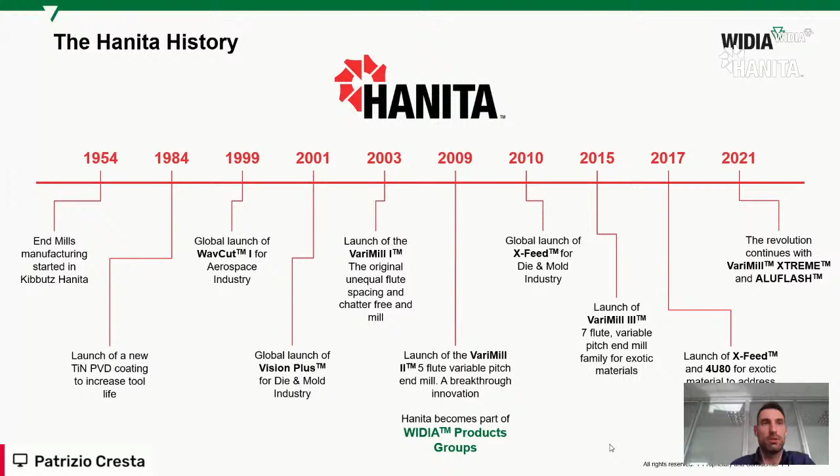With this being said, we can also start looking at some of our historical pictures. As I mentioned, in 1984 Hanita was one of the first companies to adopt the titanium nitride PVD coating, and this is the picture of the first machine. If you have some experience in tool production, you can probably recognize a machine similar to that. If you have never seen something like that, put a like or put a comment.

So by the way, this is a machine that was used to coat cutting tools. The yellow stuff over there is basically the place where you put all the tools. They rotate, and through a very complex process involving a lot of chemical and electricity stuff, it creates the coating layer on the products.

You can see that this stuff is yellow because titanium nitride is basically a yellow-colored type of coating. So this machine was called BAI 730, okay?

As I mentioned, at the time Hanita bought this machine for a huge amount of money, it was one of only three companies having this type of machine. There was only one other machine in Japan, another in the US, and this third one in Israel. So we were at the forefront of innovation at the time, acquiring this type of machine to make the titanium nitride PVD coating.

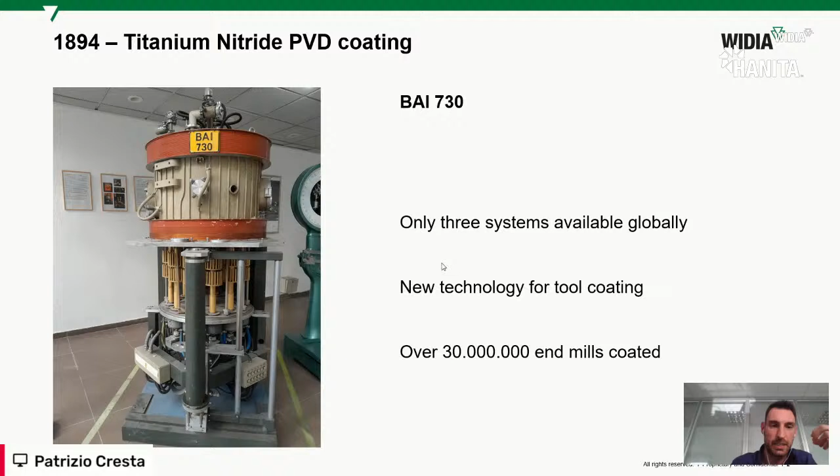All right, so that already gives you a feeling about the innovation behind the Hanita brand. And then, this was funny and very interesting for me, sharing some pieces of old marketing. This was one of the brochures that Hanita was using to commercialize and promote the titanium nitride coating, mainly on HSS type tools at the beginning, because we're talking about the 80s, 1984, 1985, something like that.

And then, of course, from HSS, so the high-speed steel, the titanium nitride coating has also been used in carbide type tooling, right? So it's also very interesting to see the marketing from the past. I'm a marketing person also, and it's interesting to learn from the past to better develop the marketing for the future, I believe.

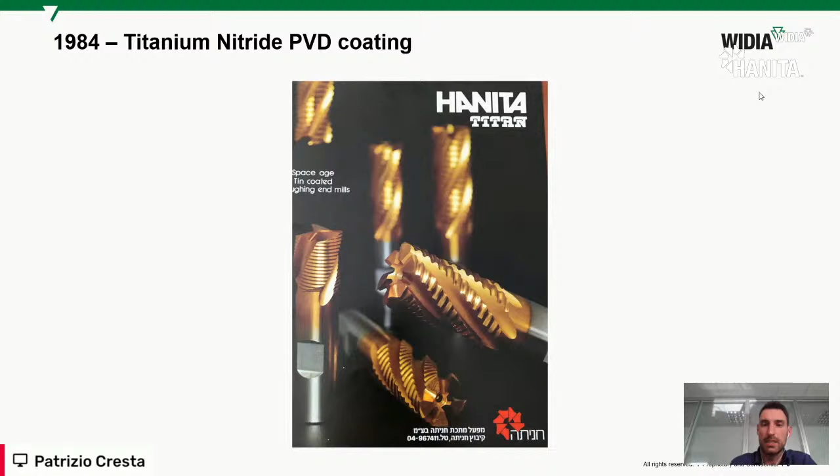All right, so that's not too bad. Now, from the technology, I believe we can also look at some of the products. And as I mentioned, titanium nitride was 1984. I was like 1 year old, so it's a long time ago.

And then comes 1999. Also here, I believe Hanita made a big step ahead in technology, because they introduced the WavCut tool, or probably geometry, okay? They had a couple of versions.

In the past we had the WavCut 1 and the WavCut 2, and this was another kind of revolution because the WavCut was dedicated mainly for aerospace, and mainly for titanium. You know that in aerospace there is a lot of titanium, especially for structural parts. And the very good thing is that we are still providing this type of tool to customers. So even if this is an HSS tool and this technology started in 1999, there are still customers taking benefit of this type of technology.

Because you have to think that the machine tool side of the business doesn't progress the same way, because when a customer or a shop floor buys a machine, it probably lasts for 30 years, right? So probably there are a lot of medium to old generation machines still available.

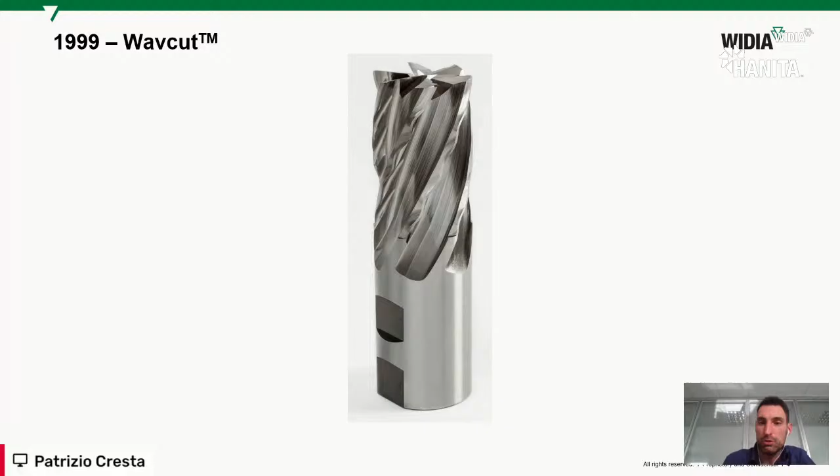Because you know that in titanium there are several problems, right? It's not only a hard to machine material because it's not extremely hard, but it's a refractory material, first of all. Second, it's a type of material that normally makes long stringy chips. So you have two problems.

The first one is that you have to manage the temperature and the cutting forces, to avoid the heat going up too much, because higher the temperature, shorter the tool life - very basic rule of the machining world. So the WavCut shape was able to reduce the cutting forces, and reducing the cutting forces basically lowers the temperature developed during cutting, which is very critical for titanium machining.

On the other side, the problem with titanium is normally the long stringy chips, and those chips are always a problem, because if you don't have the proper form of the chips, you're just creating a big bird nest on the tool. This can be a problem not only for the integrity of the tool, but also for the safety of the overall operation. With the WavCut, we've been able to address the two problems together - creating small, more manageable chips, and at the same time lowering the cutting forces, then lowering the temperature.

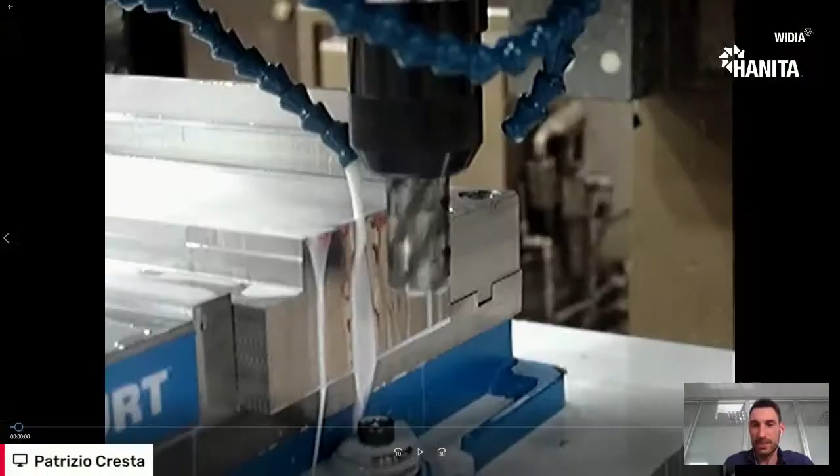So for this, I really would love to show you a video, and I hope I can do it without making any big mistake here, because as I mentioned, between all the 100 buttons I have to play, it can be a problem. So this is a kind of application that the WavCut can do.

Imagine that the component we have on the machine table at the moment is a titanium component. This is a 40 millimeter cutter taking a full slot operation. You see, we put a lot of coolant, of course, because you must machine titanium with coolant for the temperature topic that we mentioned at the beginning.

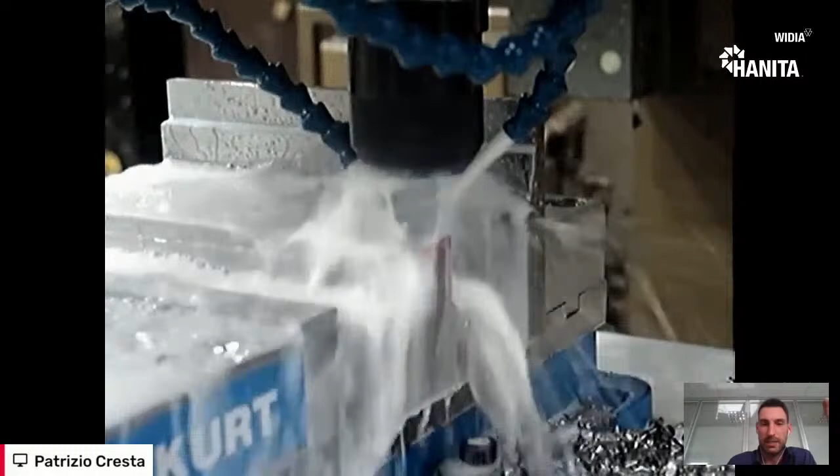But anyway, think about that - this is a 40 millimeter cutter, so it's a big one, taking a full slot with a depth of cut bigger than 1.1 times D, so probably 45 or 50 millimeters depth of cut, almost 2 inches. Believe me, there are still a lot of customers making applications like that.

Even on multiple spindle machines, they are running this type of application with 3 or 5 end mills at the same time. So it's critical to keep the cutting forces as low as possible. In 1999, Hanita was able to provide a technology like that, not only in terms of tool life, but also in terms of chip management.

If you are used to machining titanium, you know very well what I'm talking about - managing the chip in titanium is something crazy sometimes. With the WavCut technology, we are able to manage the chip in this way to make sure we don't create any bird nesting or any major issue in terms of chip evacuation. It was 1999, and now, more than 20 years after, there are still customers applying this technology successfully and being competitive in their market.

By the way, it's always very nice to see a video like this because I love making chips. I'm a guy coming from the shop floor, and I love making chips, so I love to see this type of video. Okay, so I see in the meantime other people joining from Canada - thanks for being here.

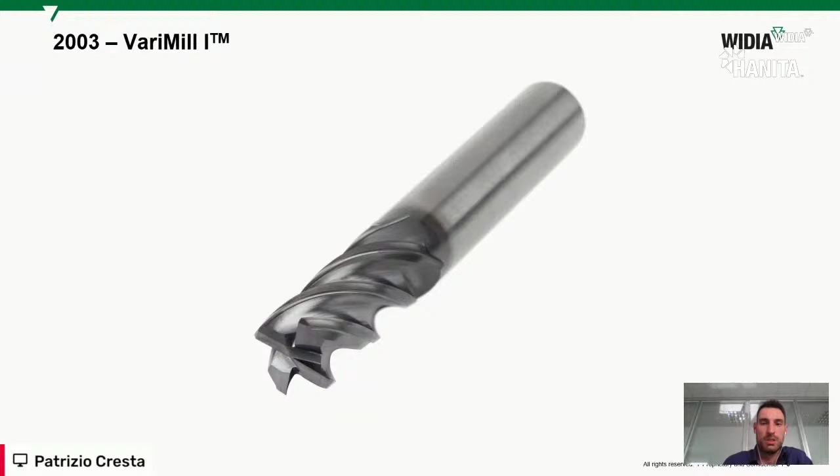Our technology moved forward, and in 2003, I believe, came one of the biggest revolutions for years - many competitors tried to copy the same technology and geometry that we have here. So 2003 was the time for the VariMill 1, our core technology. We apply the VariMill everywhere because at the time it was really a kind of revolution.

The VariMill 1 is basically a 4-flute type of cutter. When I talk about the 4-flute, I'm talking about the bread and butter of machining - every single shop floor applies a 4-flute cutter, from driven tool on a lathe down to the most advanced machining center, because a 4-flute is normally the all-around technology. You can apply it almost everywhere, in almost every kind of material, probably except aluminum or non-ferrous material.

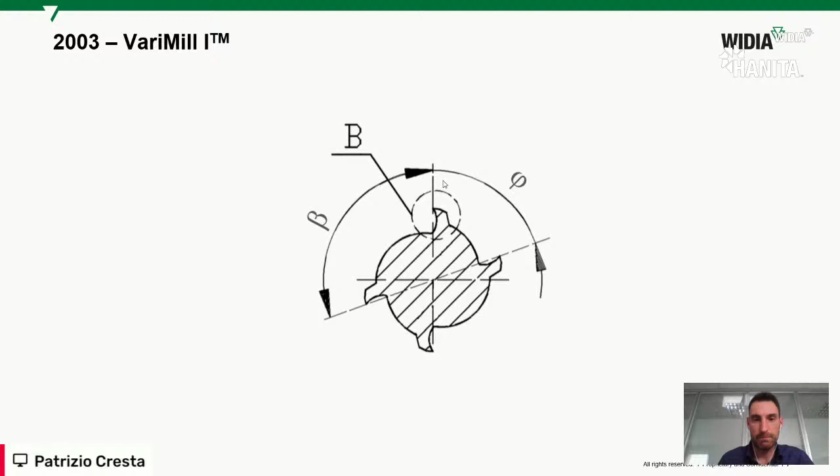Even from the marketing standpoint, it's very interesting for me to remember some of the advertising we did at the time, showcasing the 4777 tool - probably the first VariMill 1 that was introduced. It's the regular, 2 times the depth of cut with non-neck cylindrical shank, 4-flute design, and at the bottom we were explaining what I just explained to you.

The point is that the cutting edges were not regularly spaced, but had this kind of irregular angles between the cutting edges, with a very specific helix angle. There were a lot of elements, but really the irregular flute spacing was the most important piece of technology applied on the VariMill 1.

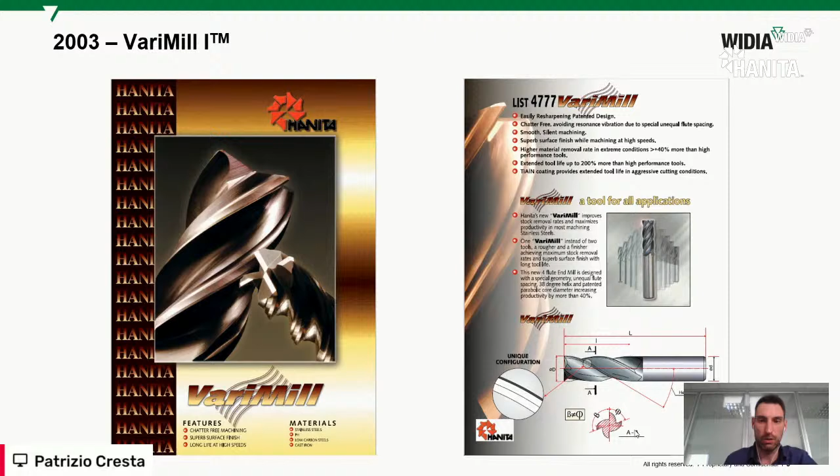When you think about the VariMill 1, the 4777 was the first one - it was the very basic 4-flute with standard lengths. But as I mentioned, we never stopped innovating, or creating more tools for different needs of our customers.

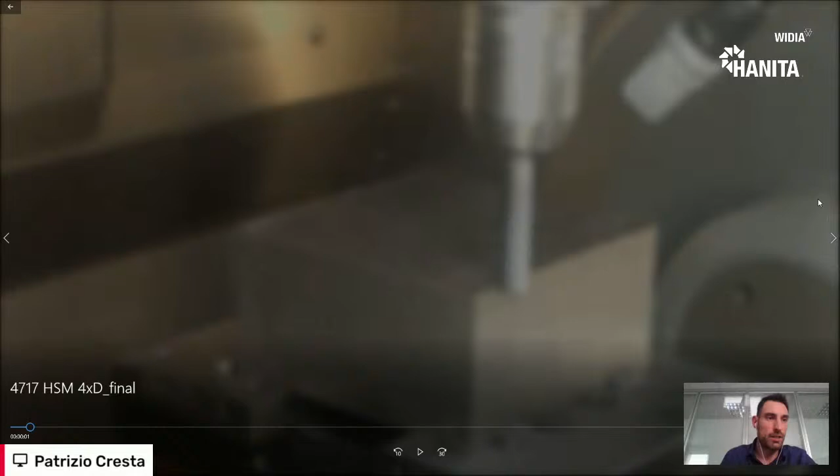Now I will share another short video about the VariMill 1, where thanks also to the most recent technology developed from the CAM side and the machine side, trochoidal - or I should say dynamic milling - became more and more prominent. This is the kind of technology where the radial engagement is always limited, and the advantage comes from the possibility to take a high depth of cut.

So we have developed a tool called 4717, that is still the 4-flute technology from the original VariMill 1 development, but now capable to address the dynamic milling requirement. So this is a 4 times the long tool, the total depth of cut capability is about 4 times the diameter. This is an application that demonstrates the capability of the VariMill that was developed in 2003, when dynamic milling didn't even exist.

So with the technology, we were already years ahead of anybody, because now we have the demonstration that even a technology coming from 2003 is now capable to really address the needs of a method in milling that has been developed over the last probably 5 years. It's becoming more and more prominent. Everybody's speaking about dynamic milling, CAM software, dynamic machines.

And I believe that chip evacuation is a very good point. Because when we think about the 5 flute, we normally think a tool can only go around the component, so we can do side milling, maybe up to 40% radial engagement, because you might think the space between the cutting edge is not enough to handle heavy cut.

But the other thing that has been revolutionary with the VariMill 2, and still today is at the cutting edge of innovation, is its capability to take full slot cut down to 1 times the diameter in depth of cut. I'm sorry if I go back and forth, but I'm doing a tremendous job managing all the buttons in front of me. I need to convince my company to hire an assistant only for myself, but it will be almost impossible. Anyway, coming back to the topic of full slot.

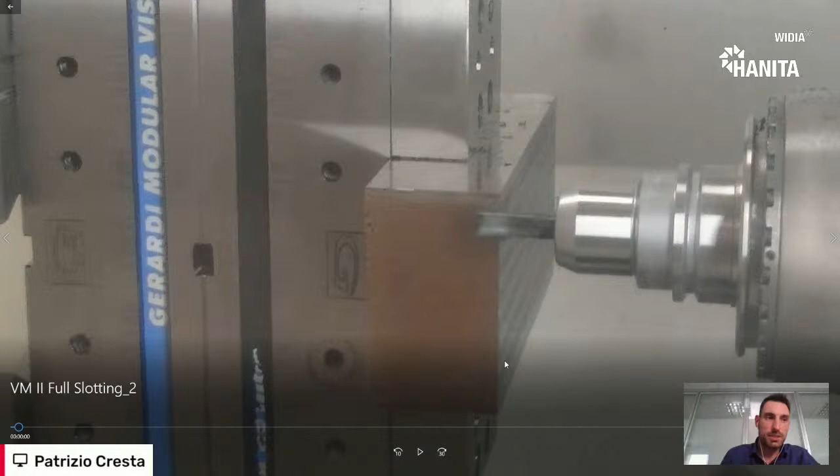The VariMill 2 is a 5 flute cutter. As I mentioned, most of us probably think a 5 flute can only go around a component, making side milling operations. Here you can see with the 5777, our 5 flute cutter, the VariMill 2, we have the possibility, proven here as we're looking at the video together, of making a full slot into our component, up to 1 times diameter in depth of cut. So if you have a 3/4 inch cutter diameter, we can go 3/4 inch depth of cut. If you have a 20mm cutter, we can go 20mm depth of cut. And this is exactly what we're doing.

So the incredible technology behind the VariMill 2 gives it the capability to have more cutting edges and make the same heavy cut we normally do with the 4 flute. Now what we're looking at is a steel component, I believe it was 4140, only for the sake of demonstration, because we can run this dry and see the operation very well. By the way, look at the chip evacuation, look at how the chips are flying out of the cutting zone, meaning the chip formation is basically perfect.

But anyway, the VariMill 1 and the VariMill 2 have been developed in different styles, we can say 2 main buckets: one for steel and cast iron, and then we also have versions more focused on super alloys, because Hanita has been very well connected to aerospace since the beginning of its history. Aerospace or any challenging type of material, including PH steel, stainless steel, titanium, Inconel, Waspaloy, all this kind of stuff. So the great capability of the VariMill 2 was really the possibility to make this type of heavy cut, even with 5 teeth, which is not really something super common for this type of tool.

All right, so now coming back to that, this was the technology around the VariMill 2. And this is another piece of marketing, and I think what I explained to you has also been very well explained in the piece of marketing we made at that time. So full slot up to 1x, unequal flute spacing. And basically, the other crazy thing is that with the VariMill 1 and the VariMill 2, you are still able today to make both roughing and finishing operations with the same tool.

Okay, so the other component of the VariMill technology is always about the versatility. And the versatility is not only about the material range you can cover with one tool, but also the application range you can cover with one tool. The cutting edge we have on the VariMill is always a continuous cutting edge, so we don't have any chip breaker geometry there. So you have also the possibility to make finishing operations, leaving a good finish on both the wall and the floor of the component.

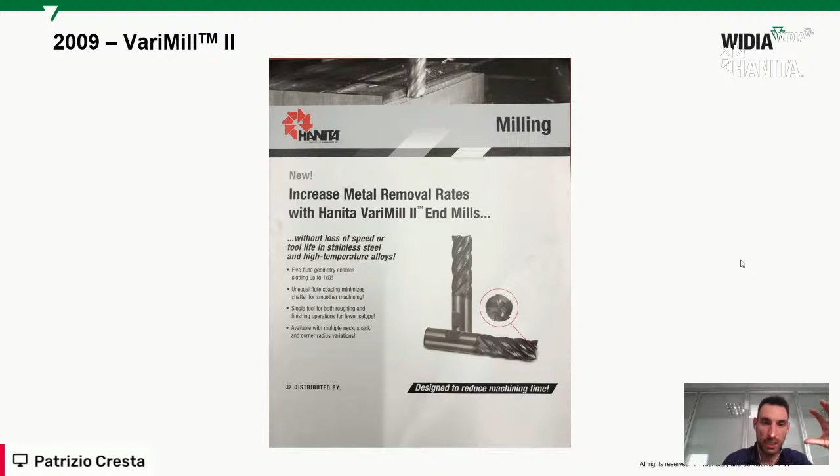Okay, and if you think about that, if you work on a shop floor and you need to be fast producing your part, and you can do roughing and finishing using one single tool, that's great for you because you cut the time of tool change and save one tool. So it's not only a value saving because you have to buy only one tool instead of two, but on the other side you also cut on machining time because you don't need to waste time going far from the component, changing your tool, coming back. So this is time that you anyway have to pay at the end of the day. So versatility is another big concept around the VariMill technology.

Now, next step in evolution into the VariMill family has been the VariMill 3, starting from 2015, and I was part of this launch because at the time I was responsible for the European region to push the product and assist our customers in applying our product. And I remember very well the time when we launched the VariMill 3 - it's a 7-flute cutter that was really impressive.

And in our standard portfolio with the VariMill 3, we go up to 5 times the depth of cut. So it's really a long tool that is made 100% for dynamic milling. When you have 7 flutes, you don't have too much space between the flutes. Of course, with this type of tool, you cannot take a full slot operation, but you can do dynamic milling super fast. And this is basically the point around the VariMill 3.

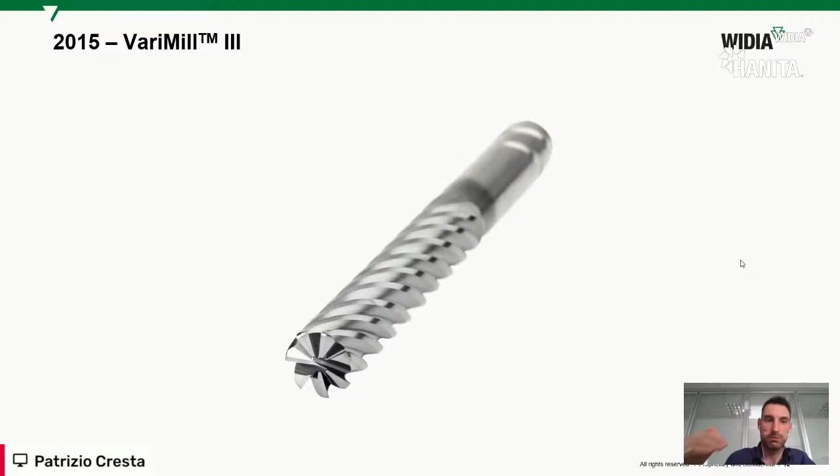All right, so again, coming back to some of the videos that I have collected - and here I have to give a lot of kudos to my colleague Mike because he provided me this very nice video that I want to show you now.

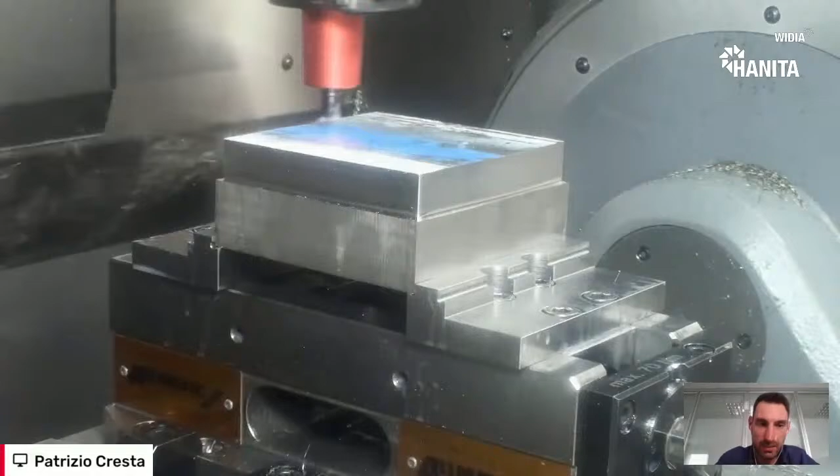Basically, this is what the VariMill 3 can do for you. This is a machining operation on stainless steel. Be very careful with that.

This is an operation that we are running dry with absolutely no problem. Cutting speed was around 300 meters per minute, so if we turn this into SFM, it's about 900 and more SFM. It's a crazy speed when you think about stainless steel. But anyway, this is exactly the type of operation we developed the VariMill 3 for.

All right, so I don't understand why the video is not really going fluid, let me say.

But anyway, it's all about this technology in dynamic milling - the possibility to go very fast around the component using the maximum depth of cut you can, and a very limited radial engagement, having the chips flying all around. This is one of the ways you can deliver productivity.

Of course, this is not only about the tool. When you do dynamic milling, it's also about the machine and the software that you're using to program dynamic milling. So you need to have the combination between the three elements to make sure you can run a successful dynamic milling operation.

But anyway, we are tool makers, we are tool producers, and this is exactly what we did to address this requirement from the customer perspective - the possibility to make dynamic milling operation in a proper way.

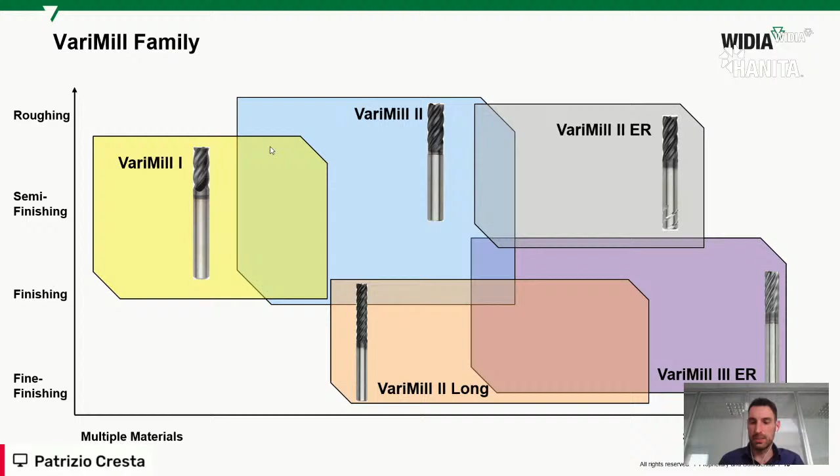Now, of course, Hanita is not only VariMill. The Hanita portfolio is huge because over the course of history we introduced many different types of tools, like the tool dedicated for the die and mold industry, mainly for what we call hard type of machining - 60 Rockwell C, 62 Rockwell C, something like that.

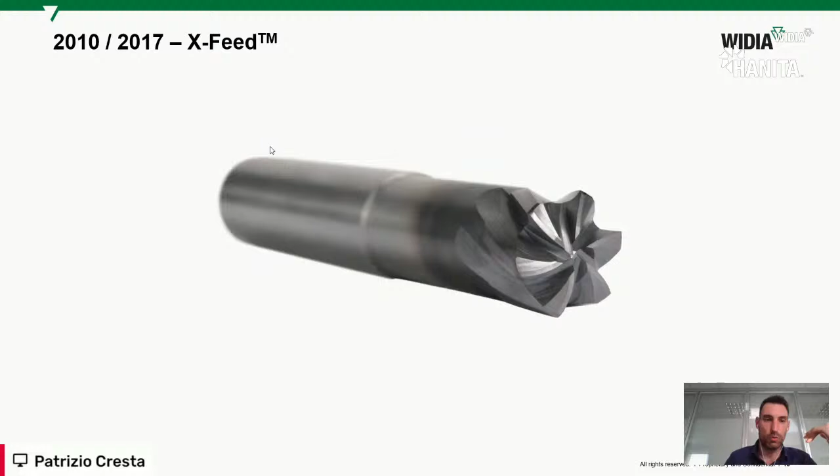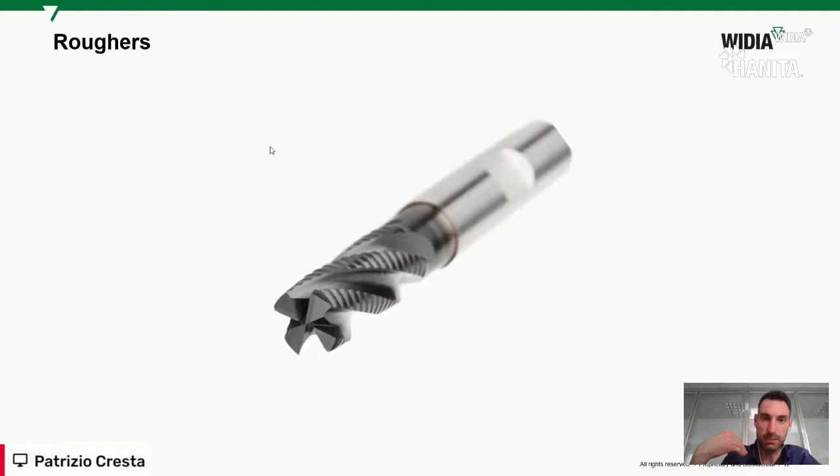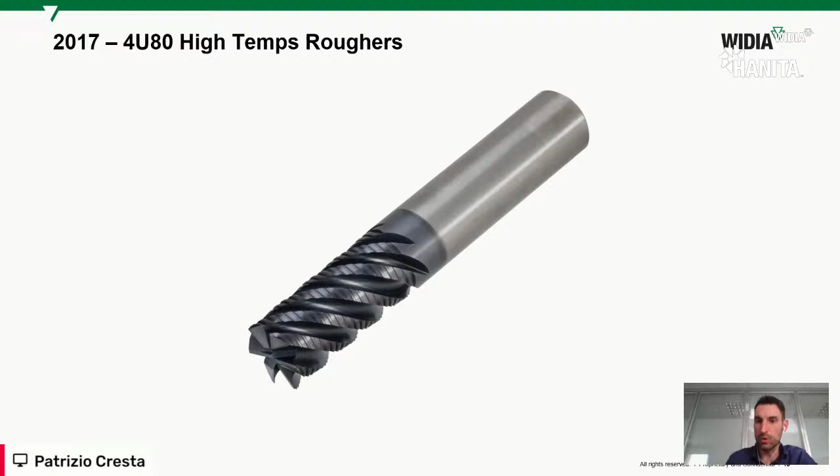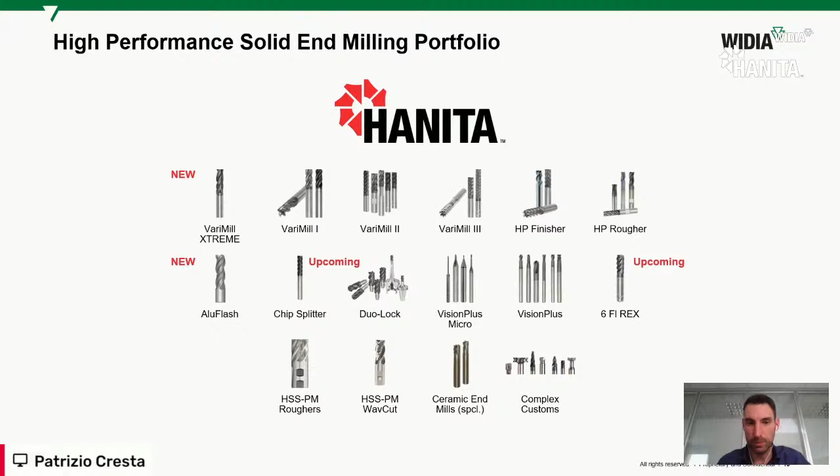For example, the 4U80 technology in 2017 has been one of the advancements that we did over the year, to make sure that we can address also the needs of those customers. Today the Hanita portfolio is really a big portfolio with multiple platforms, to make sure that we always have the right solution for the requirement of our customer.

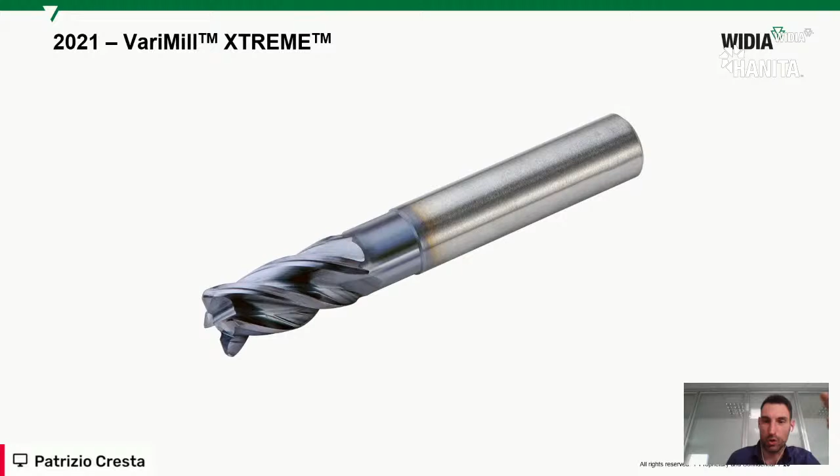As I mentioned, the evolution didn't stop. Now we are in 2021. At the beginning of this month, we released the next step into the VariMill family called the VariMill Extreme. It's absolutely a mind-blowing technology in my eyes, because it is still a 4-flute.

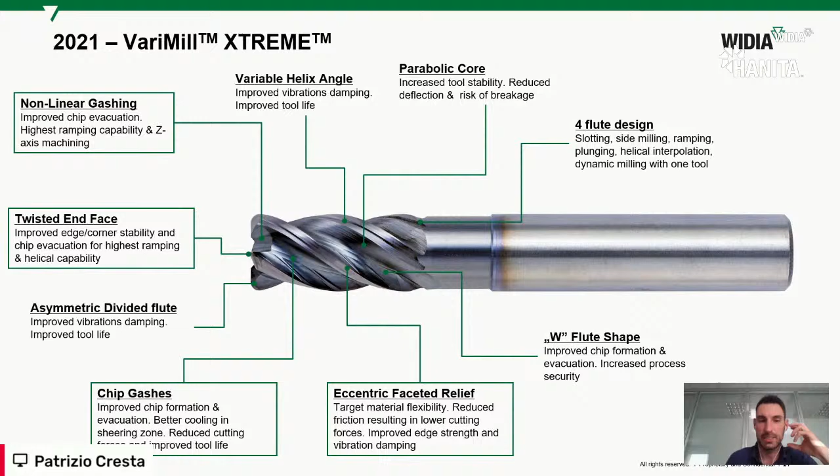I don't want to spend all the time talking about every single detail, but we basically reinvented a 4-flute type of cut. We really reinvented that. The 4-flute, as I mentioned before, is like the bread and butter of machining, because everyone has a 4-flute - there's nothing serious about that. But the point is we've been able to reinvent, applying multiple patents, to create new patented geometry and apply it into the VariMill Extreme, to make the tool even more productive than the original VariMill technology. This is what it is.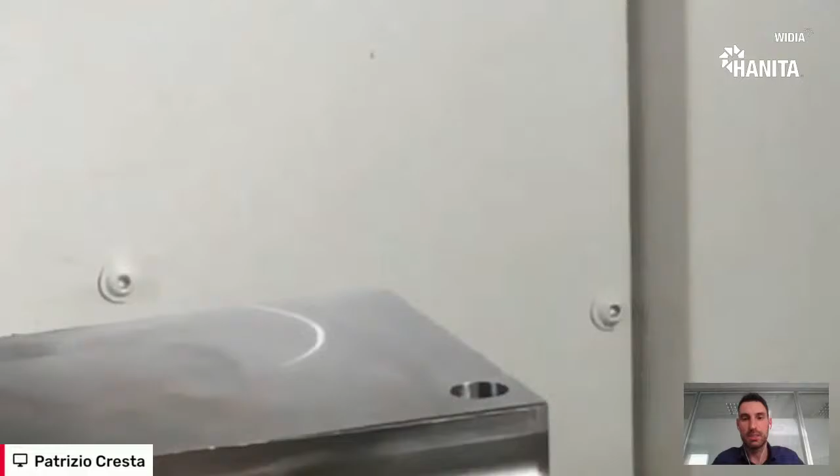With this, I believe we've said a lot already. I hope I've been able to transmit to you the excitement around the Hanita portfolio, around the products and the great technology that we have.

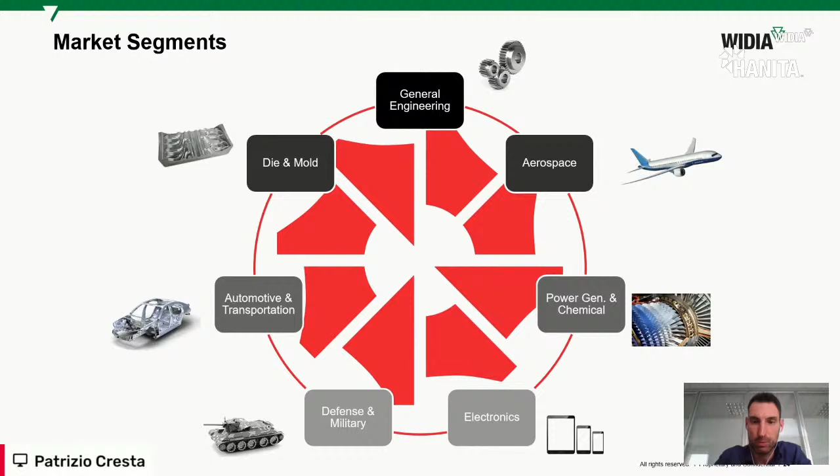One thing I want to mention is that with this portfolio and capability, we are now able to address multiple types of segments, starting from general engineering down to aerospace, power generation, electronics, military and defense, automotive, die and mold. So there are really multiple markets where we are supporting our customers in achieving their productivity needs.

And as I mentioned, the evolution is not stopping. We are about to launch another new product. I don't want to say too much about that - I'll leave you with a little bitter taste, because you will hear more. Probably we will schedule another live event, or you will get more information about the next type of tool we are releasing in about 4 weeks. So stay tuned for that.